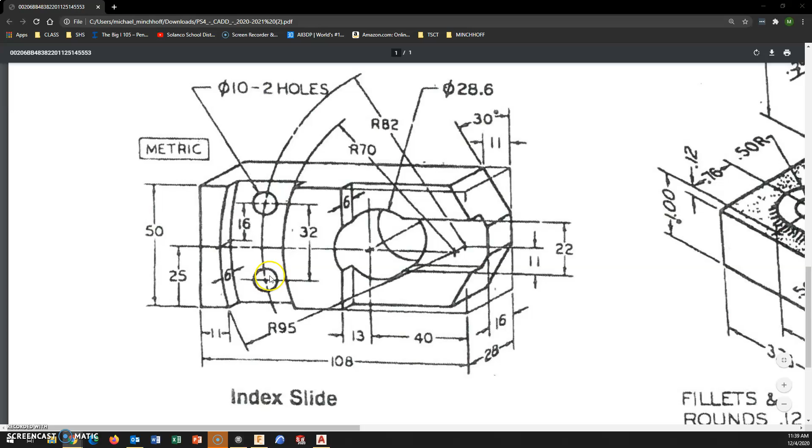This will then become the center for this arc of 70, the arc for these two holes that are a radius of 82, and this trailing arc for this groove of 95. Do some 30-degree cuts, large bore hole in the middle, two equal distance holes. It is in millimeters.

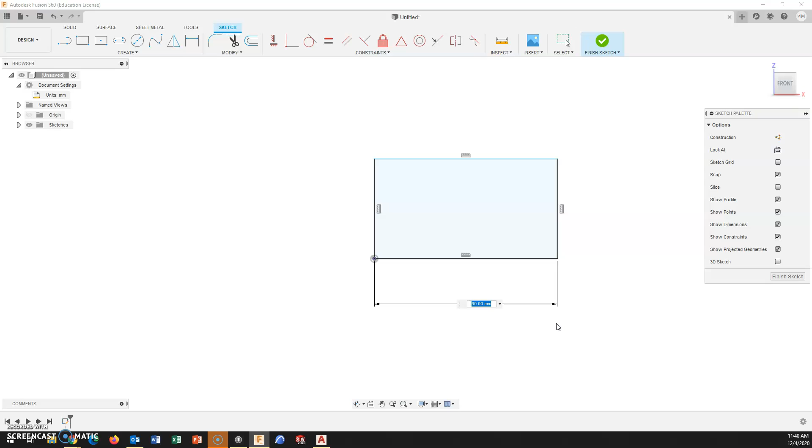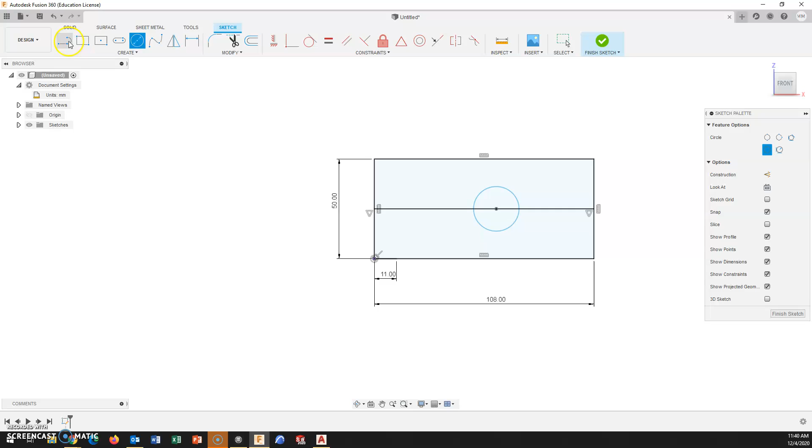Large rectangle. I have an overall length of 108 and an overall height of 50. By setting this line down the middle, I now have something to snap to as I start creating some more of these features. I want to measure 11 millimeters in. I could do this at the top as well, but I do want to measure 11 millimeters. And this line, once it connects or snaps to that midline, I want to set this as a true length of 95. This is the center for those arcs that are going to be created.

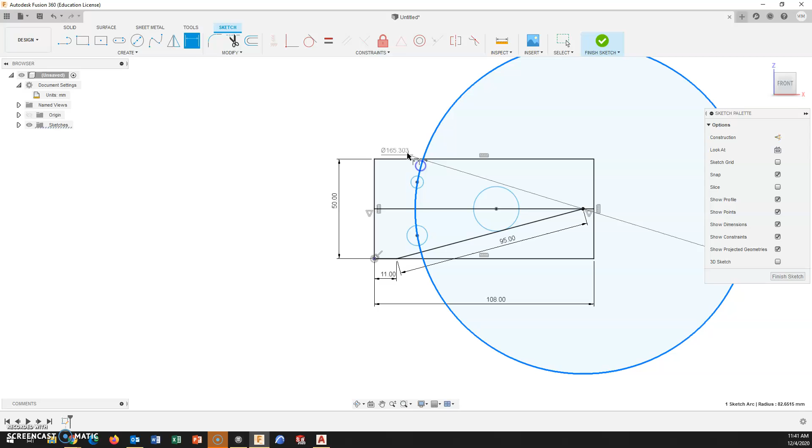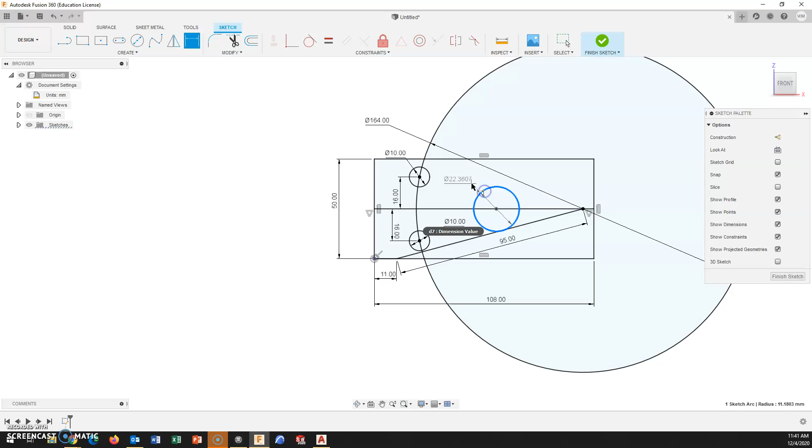I'm going to opt to use a circle. I have two holes, and being that this has a radius of 82, 82 times 2, these are both a diameter of 10. They are on that arc. Distance from the center is 16 for both of them. This larger diameter hole is a diameter of 28.6 and takes place 40 millimeters in from the end.

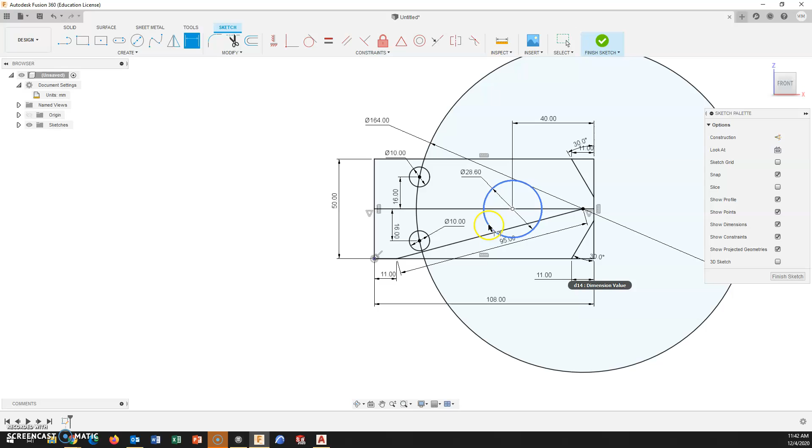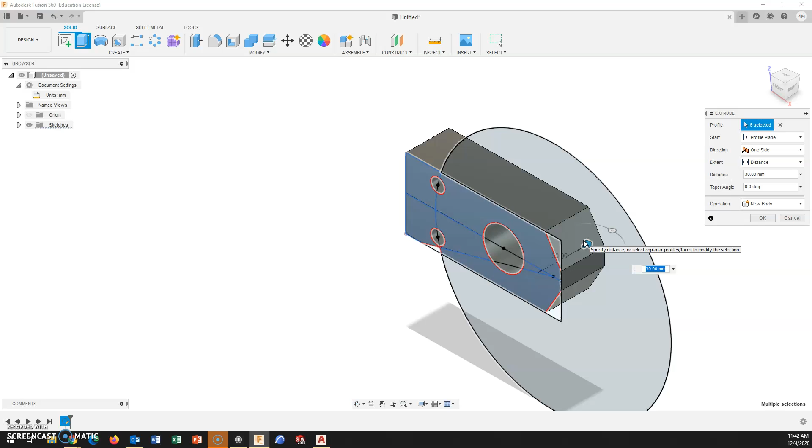I'm going to cut these 45-degree angles, not 45, they're 30. This is a 30-degree angle at 11 millimeters. This will be about all the information at this point in time that I can gain or create here in the front view, all at one time. I will have to replicate this again, this 11 and 95, to find that concentric center. We do have an overall width of 28 millimeters. Oh, forgot a piece.

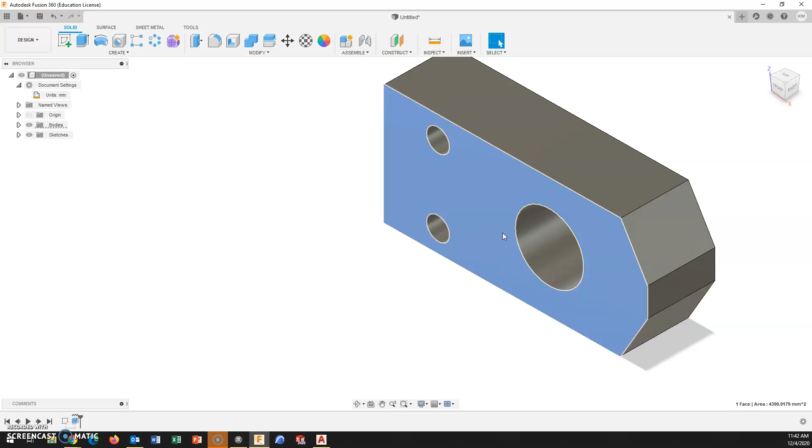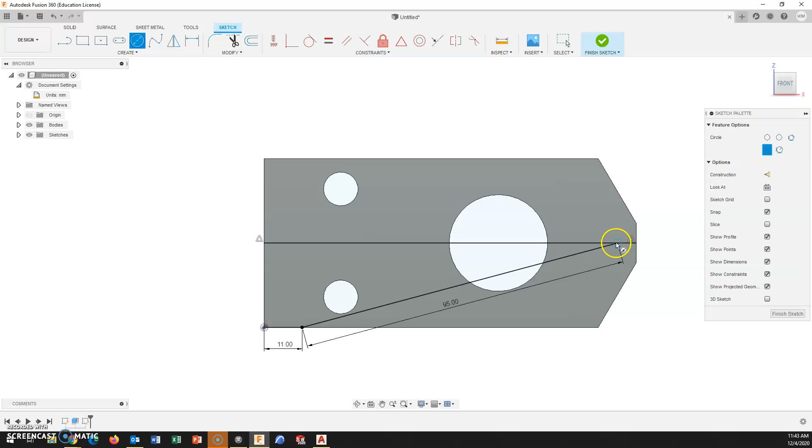What you want to cut next honestly doesn't matter, but I'm going to cut this groove and this rectangle next because they are both cut to the same depth. They are both 6 millimeters deep. So I'm going to start by constructing a line. And again, we have to replicate that 11 midpoint or midline and 95 to strike these two arcs. So 11, 95. This circle should snap because you've already set the radius. And we have another one. The radius is 70, so I need a circle diameter of 140.

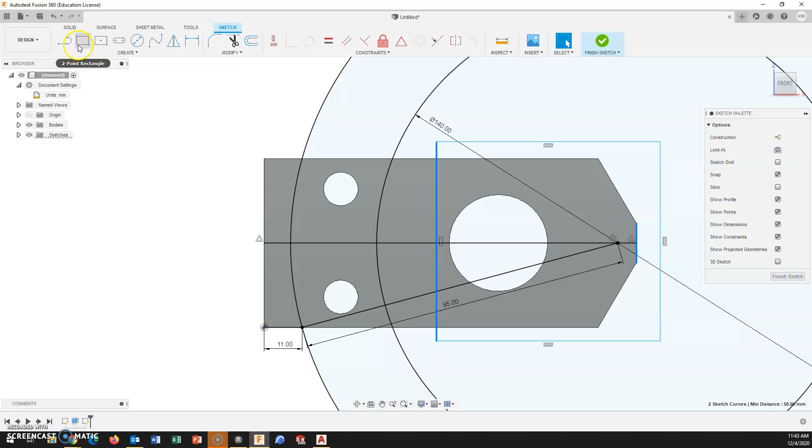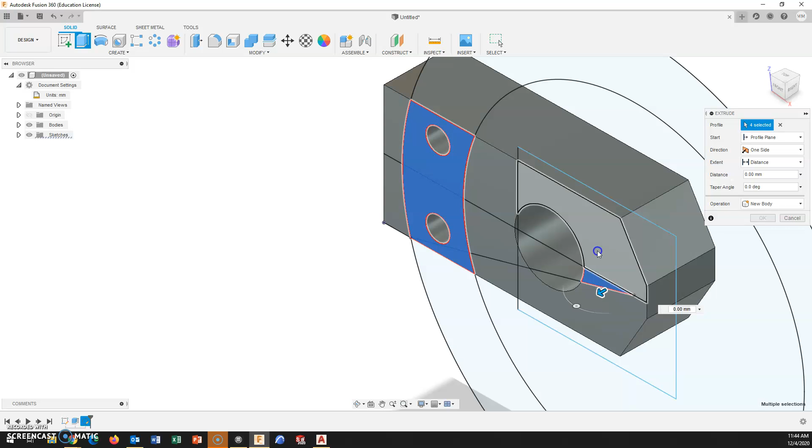Now I just need to cut a rectangle off. I'm just going to set a length off this front edge. Actually, not there. Yeah, 40 plus 13. So this is going to be cut 6 deep, both at the same time. And I do want to make sure that I am cutting. Don't forget a piece. -6. And all I have left is a groove here.

Center rectangle. We'll save you some dimensioning. It is 22 millimeters wide. And it is cut 28 and 6 and 16. I want 16 from the back. So I need to cut this what? 28 minus 16 is 12.

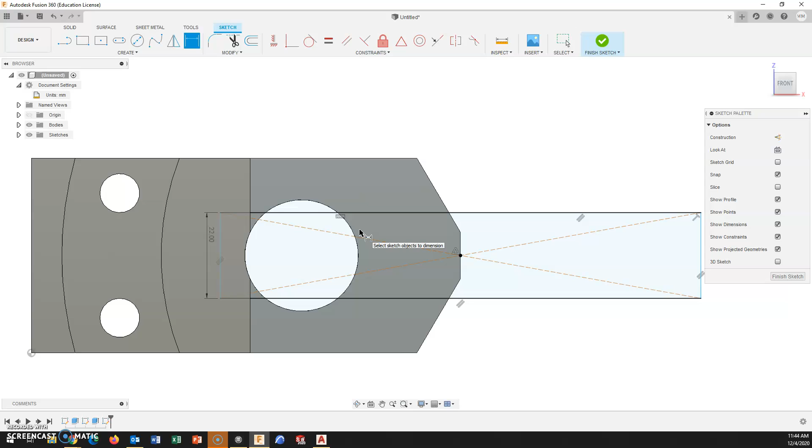I'll cut that 6 millimeters deep. Just this, I'm going to cut 6 millimeters deep. I'm going to check my math. That should be 16, and it is. All right, everything checks out. There is your index slide.